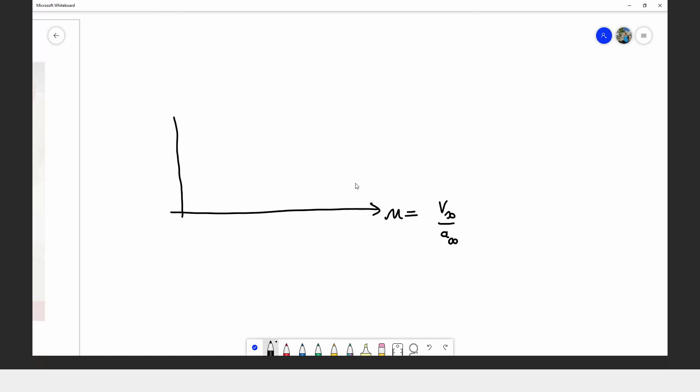Alright. So actually saya nak share gambar sebenarnya, tak jumpa gambar dia. Actually ada satu gambar dalam bidang aeronautics. Okay, dia ada satu graf yang kita panggil Mach divergence. This is adalah Mach number. Mach number ni adalah ratio di antara speed of aircraft dengan speed of sound. Kan? So kalau kita tengokkan drag, daya seret pesawat.

Pesawat ni biasanya dia akan almost constant up to certain Mach number. So bila dia sampai satu Mach number yang dia panggil critical Mach number, then this drag akan mula naik. Okay, dia akan naik dan terus naik.

So saya punya anggapan, okay, sebelum ni kita boleh control kita punya COVID. So kita punya numbers of cases almost kita boleh control lah. Yang awal-awal dulu kan, less than 100 dulu. Lepas tu dia dah mula naik. Kat sini ni selepas pilihan raya dekat Sabah, bukan nak blame pilihan raya tu, tapi it's proven selepas tu kes meningkat. So selepas tu kita dah ada dekat sini, sampai kat sini.

So sekarang ni kes tu mungkin kita ada dekat sini, ataupun kita mungkin dah ada dekat sini. Sebab benda ni dia adalah satu masa nanti dia dilimitkan oleh tahap kesediaan, keupayaan sistem kesihatan kita lah.

Kalau untuk aircraft ni, kalau dia bina wing tu kalau dibina untuk terbang untuk subsonik, bila dia dah capai supersonik mungkin dia boleh patah, kan. Wing tu boleh pecah ataupun patah in flight. Sebab bila kapal terbang tu dia terbang, dia cuba push, enjin boleh pergi laju tapi structure tak boleh nak tahan compressibility effect. So benda ni dia akan naik. Dia cuba pergi juga. Lepas tu dia akan ni lah.

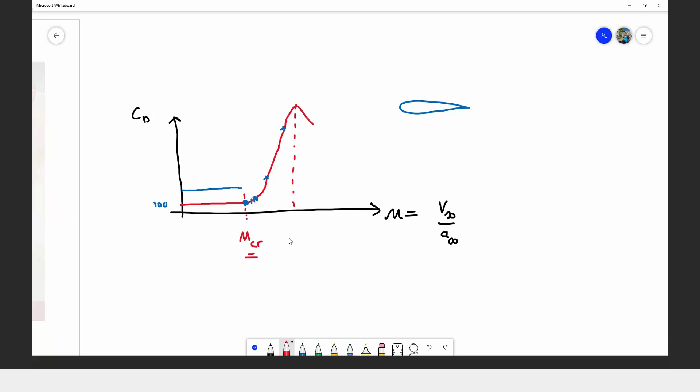So dekat sini adalah, so saya rasa sini critical point kita dah melepasi. Critical point ni maksudnya critical bila kita boleh maintain kita punya number of cases tu. And then ni bila kita dah mula tak boleh nak maintain. Kalau bila Mach number 1 dekat sini, dia dah melepasi sonic, then dia akan terus meningkat, dan dekat sini kalau structure tu tak boleh tahan, then dia akan break lah dekat sini. Tapi kalau structure tu boleh tahan, dia boleh pergi lagi. And then selepas ni kita tak tahu apa yang berlaku selepas ni.

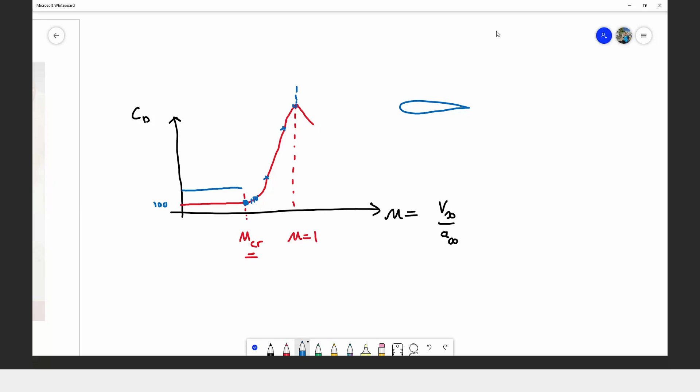So whatever kita kena avoid daripada sampai di stage di mana sistem kesihatan kita dah in chaos situation lah kat sini, kan. Chaos situation. So sometimes this is just a logic lah, just a logic. Mungkin tak tepat kan saya punya andaian saya, tapi kalau tengokkan harian kes, we are in this stage sekarang ni. Kita punya pusat-pusat bilik-bilik ICU pun dikatakan dah sampai dah hampir penuh, kan. Pusat-pusat kuarantin pun dah 90%.

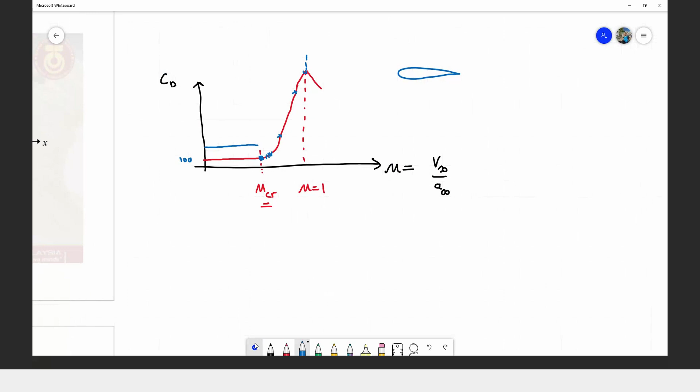So nanti, yalah, hopefully dengan PKP yang akan mula lusa ni, akan meredakanlah benda-benda ni.

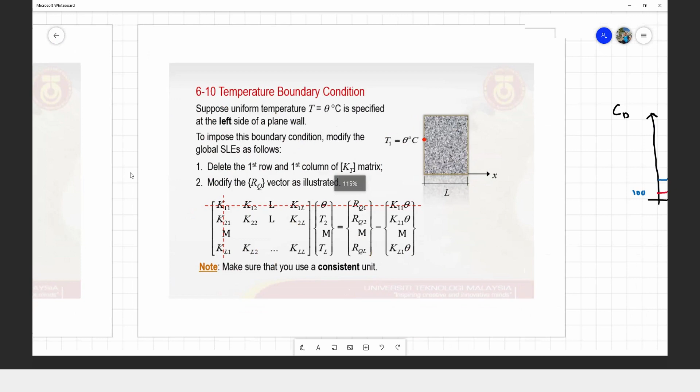Alright, saya ada air dengan saya ni, teh panas. You all pun kat rumah kan, kita buat santai-santai je hari ni. So sambil-sambil tu boleh kacau-kacau air, sambil-sambil makan breakfast juga. Sambil-sambil dengan lecture. Actually lecture ni macam saya cerita sebelum ni, actually sama je dengan yang apa yang ada dalam YouTube. Kalau you all miss dekat sini pun actually you still masih boleh follow up dekat ni lah, dekat YouTube.

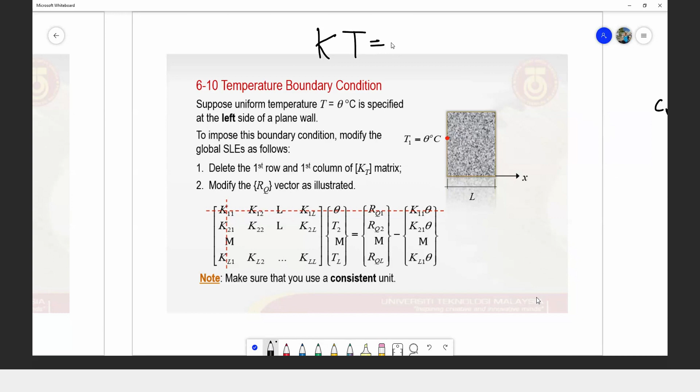So kalau saya dapat ingatkan semula, untuk kita selesaikan heat transfer, so the system of linear equation yang kita akan solve adalah dalam format K T equal to R. So K adalah kita punya, saya lupa dah nama dia apa. Nama dia elemen conductivity matrix. Elemen conductivity matrix, betul. K adalah elemen conductivity matrix.

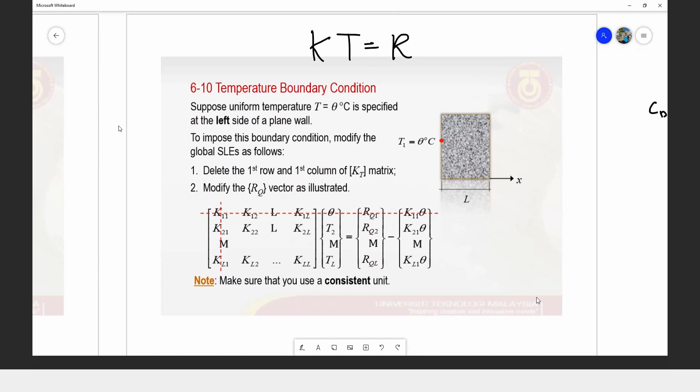T which is our temperature, which is we would like to predict it. So dalam numerical ni biasanya kita panggil predict lah. Predict kita instead of kita measure, ni dia macam lebih tepat sikit kan. Measure biasanya kita guna untuk eksperimen, measure.

Predict, so kita pakai untuk numerical, mostly kita pakai predict to predict temperature distribution. So R adalah heat rates vectors. So R adalah hanya akan ada value sekiranya adanya internal heat generation dalam kita punya sistem. Kalau tak ada, R will be always equal to 0.

Cuma untuk the temperature boundary conditions in the type of specified temperature on any surfaces of our component, then in order to apply the boundary condition, kita kena assemblekan dulu ke semua kita punya KT dengan R, barulah boleh kita applykan boundary condition. Kalau dalam kita punya structural problem dulu, kita boleh apply boundary condition pada local stage, maksudnya pada kita solve element by element tu, kita dah boleh apply boundary condition kan.

Tapi untuk heat transfer ni kita tak boleh buat macam gitu. So we have to apply it after we assemble a complete system of a linear equation, then baru kita apply itu punya boundary condition. So dia punya approach dia untuk specified heat, specified temperature on any surface, which is we can measure it.

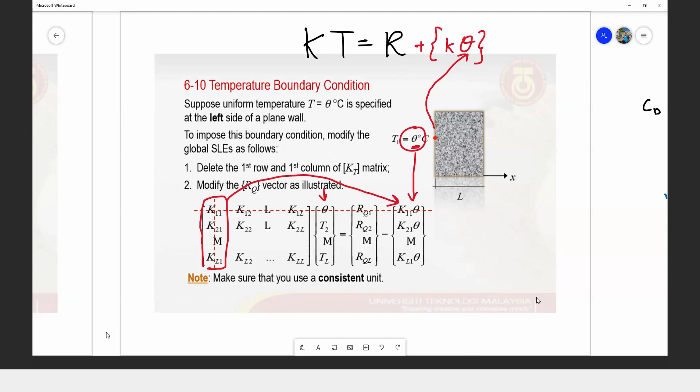So kita ada example nanti. So yang keduanya adalah the convection. Untuk convection boundary condition, that means there is a heat transfer process occurs across this plane wall.

So to further increase the heat transfer process on the right wall, dekat bahagian sini ni, kita nak improvekan dia punya heat transfer. Kalau kita tak ada convection ni, heat transfer daripada surface ni ke udara ni mungkin dia still berlaku, tapi pada kadar yang slow. Okay, bila kita blow air pada temperature yang tertentu, pada convection coefficient yang tertentu, then dia akan increasekan kadar pelepasan haba daripada surface ni ke udara lah. So that's why kita ada konsep fan, air cooler apa semua tu kan.

So in this kind of problem, we do not need to eliminate because kita tak tahu berapa suhu dekat sini ni, sebab suhu pada surface dengan suhu ambient tak sama. So kita tak tahu temperature dekat sini pun, kita still tak tahu actually. So in that case kita tak boleh eliminate the row and column. So what we have to do is, we still have to modify.

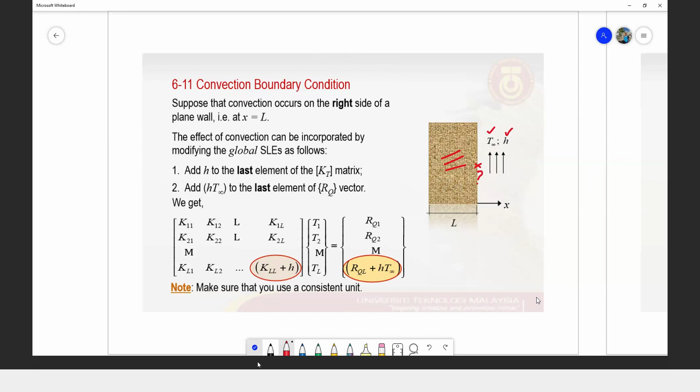Okay, actually kita punya, kalau kita ingat lagi, kita punya equation KT equal to R. So untuk this case we have to add the right hand side by H multiplied by T. Tapi yang ni adalah hanya apply kepada the surface where it exposed to the convections.

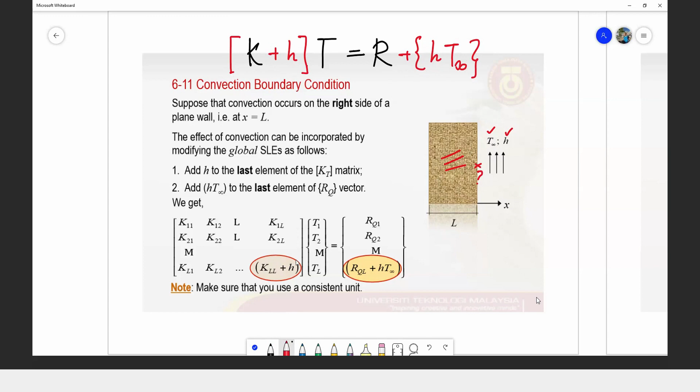On the left hand side pun we have to add the K here by H. And then similarly, yang ni hanya apply kepada the matrix element which is representing the last equation lah, ataupun representing this nodes on the surface of the plane wall. Dia bukan tambah semua, tapi hanya apply kepada the surface that exposed to convection.

So kalau saya boleh tambah kat sini ni, only apply to this one as well. Only apply to surface exposed to convection.

Tapi kalau nak senang ingat dia, roughly macam gini lah: K plus H, kita ada T, equal R plus H multiplied by T. So H adalah H convection, T adalah T infinity the convection. And then it just apply only to the nodes that are exposed, the nodes which is representing the surface that are exposed to the convection.

Let's say kalau saya ada surface dekat sini, and then surface ni pun ada convection both sides, sebab kita let's say kita ada internal energy, internal heat generation kan. So R kita ada value. So dekat sini pun kita ada convection, tapi dia punya temperature dengan H dia mungkin lain. So what we have to do adalah we just apply to the nodes number 1, which is this one lah, K plus H, and then this one plus dengan T multiplied by H untuk yang biru ni. So that's it. Yang lain-lain jangan kacau.

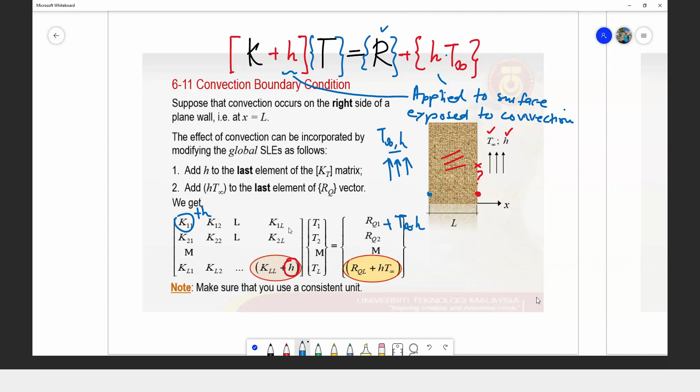Okay, next is the heat flux. So in some cases, we would like to stop the heat transfer from one region to another. Mathematically we can represent it by the heat flux boundary condition with Q, heat flux equal to 0. That means if we want to stop the heat transfer or slow it down.

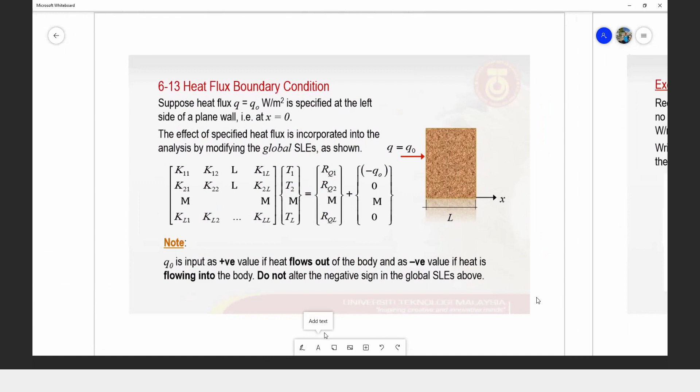And then if we are to solve this kind of problem, we have to modify our system of linear equations, KT equal to R. We still solve the same equation, KT equal to R, but in this case we have to modify the right-hand side equation by including the contribution from the heat flux across the system, across the surface.

So in this example in the slide, we have heat flux that occurs on the left surface, which in this case is our origin, x equal to 0. So at point 1 here, node number 1. In this case we just need to modify the right-hand side equation by including the heat flux to the equation number 1. So the whole row here refers to the first equation for node number 1.

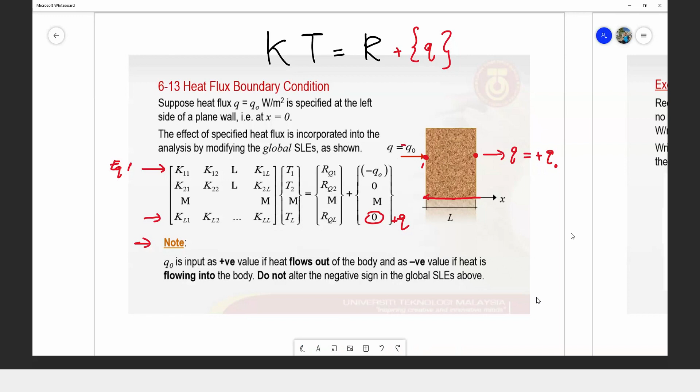So this is just a revision of what we have done in the previous meeting. But the previous meeting was a bit rushed, so let's slow down a bit today.

So now let's look at these examples. Let's take a 2 minute break, drink some water.

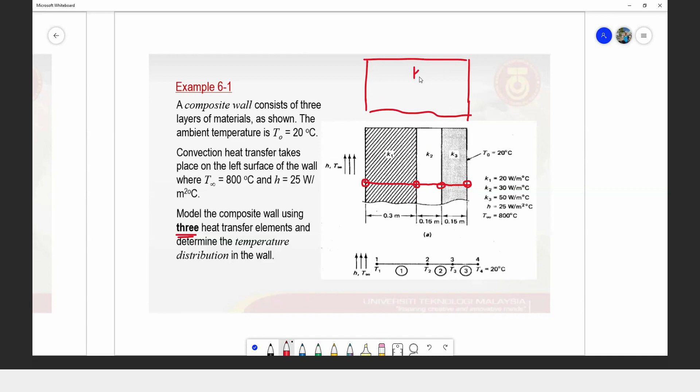So to reduce the complexity, we suggest discretize your element according to the material of your composite wall. Kalau ada satu material je, this is your block. Ada satu je material, K1 je. So macam mana nak bagikan dia kepada satu je?

Biasanya kalau dia minta bagikan kepada 3 juga, bagikan kepada 3 of equal spacing. Biasanya kita akan mention pakai equal spacing, atau K1 kita dah bagi berapa size dia.

As I mentioned, the decision on how you are going to discretize your model is actually for the engineer to decide, to instruct the computer how many elements you want to have, so the computer can generate according to the mathematical model that the software engineer developed.

Satu lagi kita panggil engineer which is using that software. Kalau saya pakai software, saya just bagi tahu the software how many elements I want to have for this structure. Let's say saya letak 10 elemen. Dengan menggunakan algorithm yang software engineer tu develop, actually dia ada mathematical model dia. Mungkin ada beberapa jenis mathematical model, so software engineer pick up one model untuk gunakan dalam software development. Based on that mathematical model itulah software tu akan generate based on input yang kita bagi.

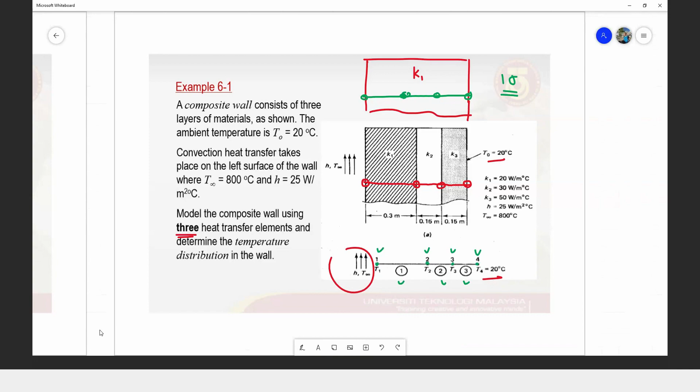So you can write as well on the right nodes we have T4, which is known already, given by 20 degrees Celsius, and then we know that on the left hand side we have this heat convection process. So this is nak tengok semula.

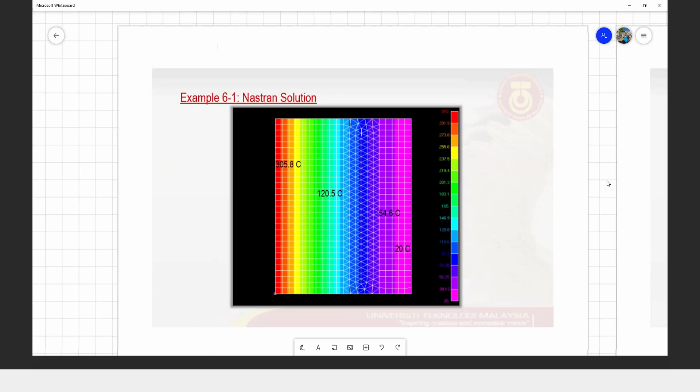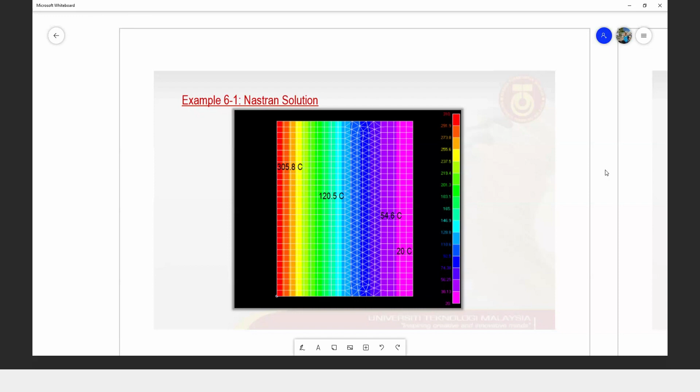So for this kind of problem yang kita ada ni, example 6.1, if we solve using any finite element software, tapi kita discretizekan model tu, kita punya wall tu dengan menggunakan finite elements mesh atau discretization yang sedikit berbeza. Macam yang kita buat kat sini, kita macam 1D problem. So actually if we solve our problem in 2D pun, okay, we will get something like this. So this is the results for the same problem.

So the result for the same problem where we have a convection of 800 degrees Celsius, and then we have 25 watt per meter square degrees Celsius. And here on the surface we have 20 degrees Celsius.

So when we solve this in 2D using Nastran finite element software, we get a distribution which looks something like this. On the very left surface, temperature is 305.8. On the second node, we have 120. Third node, 54.6. And then on the surface here, we have 20. So let's compare this with the 1D solution.

The 1D solution, which is the solution that we are going to use in our course. Alright.

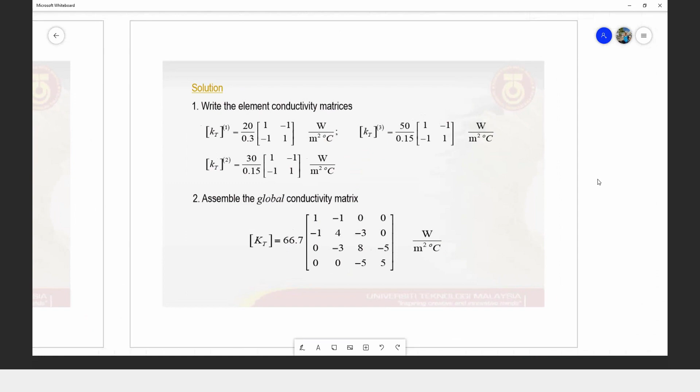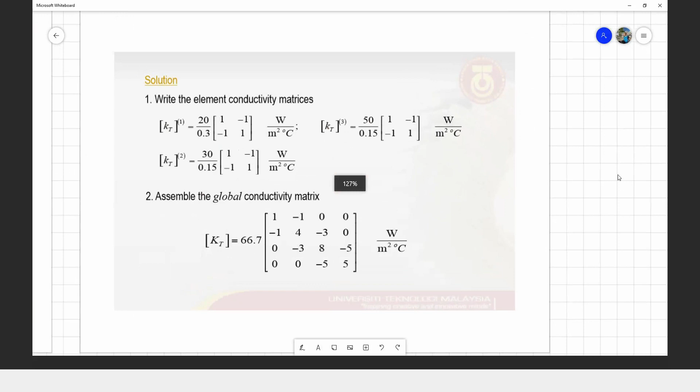So now we know that we have to solve our element conductivity matrix. We have to solve the heat rate vector element by element first, and then we have to combine it as usual. So we write the element heat conductivity matrix for each material or for each element.

So what do we have, if we remember, our K is KE given by K over L, and then we have a square matrix of 1, -1, -1 and 1. But this K is not the same K. This K is the element conductivity coefficient of the material itself, which is given in the problem.

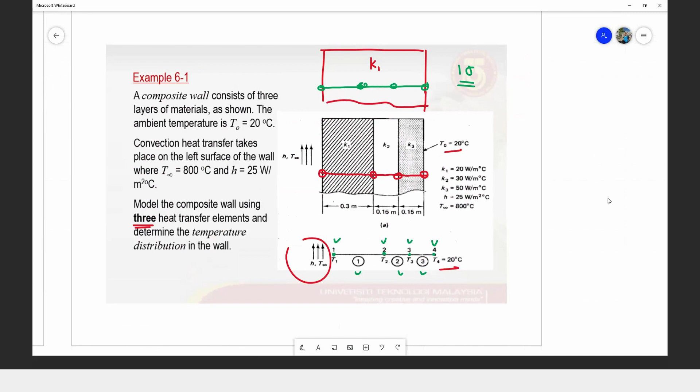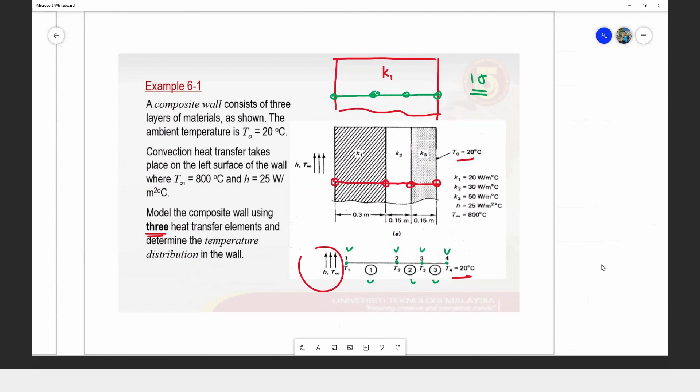Because the material usually has its material properties. Whichever material we want to use, we usually can request it, or if we know exactly what material we are going to use, then we can search for all this kind of information. You can get the stress, you can get the material, the thermal properties of that material, like that. So we have K1, K2, K3 which is given by 20, 30 and 50 watt per meter per degree Celsius. Then we substitute here, which is a very straightforward process.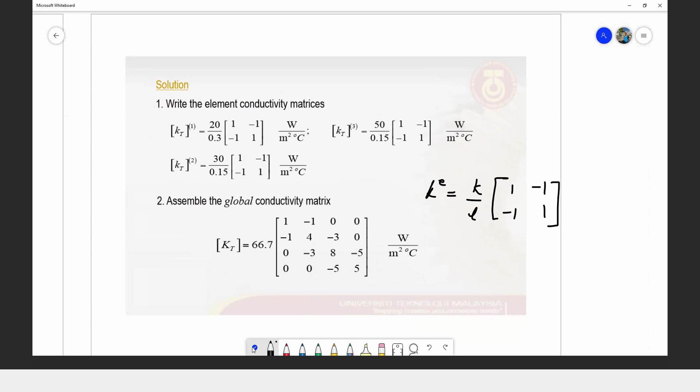So K1, K2 and K3, then you assemble similar to the 1D bar problem before. So we are done with the K, very straightforward. I won't go into too much detail since we've done this many times.

Just be careful, here we have constants. So don't forget them. Sometimes students forget this. If you just carry whatever you have in this bracket and forget to multiply by 66.7, the value becomes very very far off. 1 versus 67 is a huge difference. Imagine 1 degree Celsius versus 66, that's a huge difference.

So now, in our problem there was no mention of internal heat generation. So you can imagine here, when there is no information about internal heat generation, the R vector will be equal to 0 everywhere. So in this case, the only things you have are your K matrix, your T vector, and R vector. R will be all equal to 0.

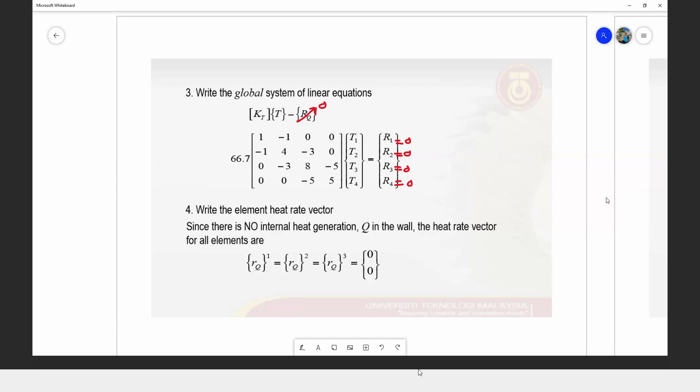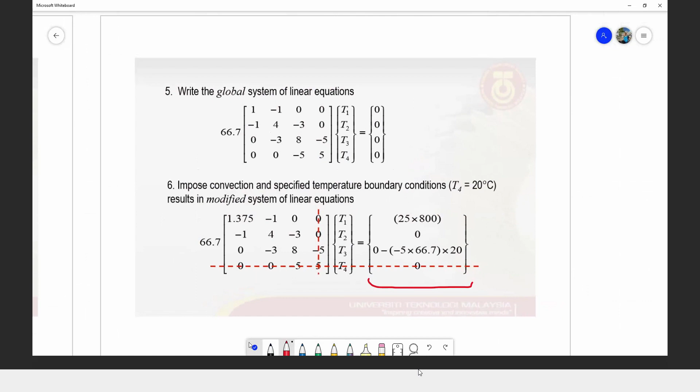But for the learning process, you include it one by one, step by step. Don't do it as a lump sum like this. If you look at step number 6 here, it's a lump sum where you include everything at once, so it's hard for you to trace what actually happens here. So for the learning process, I don't recommend this approach. What you have to do instead is detail it out.

So if we look closely to our system of linear equations, I have this. Let me take this again. So I have 66.7, and then 1, -1, 0, 0, -1, 4, -3, 0, and 0, -3, 8, -5. Then I have 0, 0, -5, 5. So this is my K matrix.

Don't forget this one. Then I have T. So this is my T1, T2, T3, and T4. And all of these will be equal to...

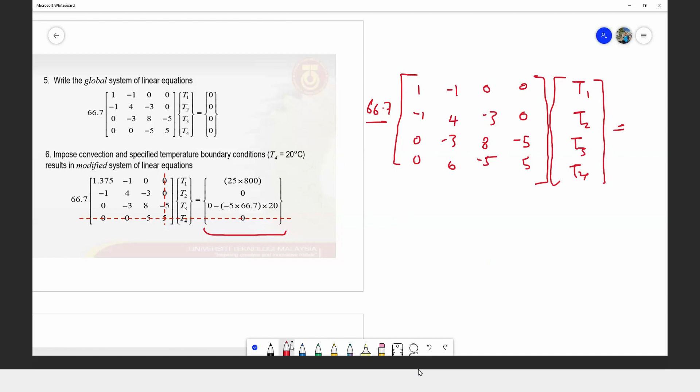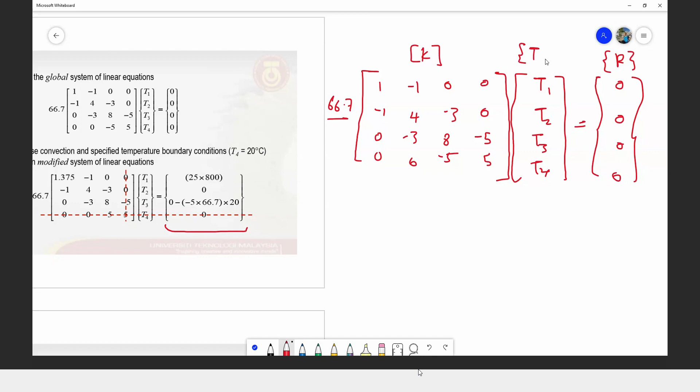Let's not rush, we solve part by part. So this is our R, which all of them equal to 0. So this is my R vector. This is my K matrix, and this is my T vector.

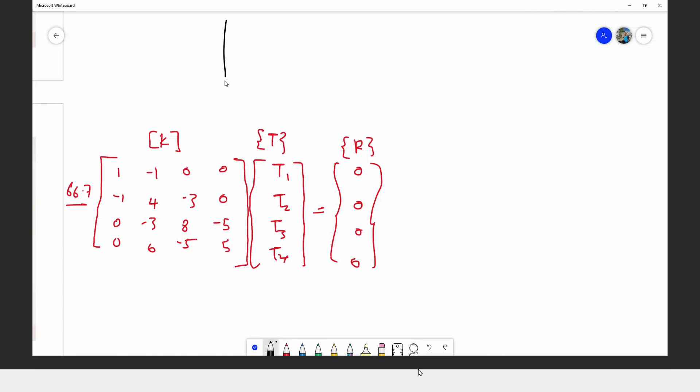Now we know, in our problem we have this structure. So we have the T, and we divide it into 3 elements. So I have node 1, 2, 1, 2, 3, 4. So element 1, element 2, element 3. There are 3 elements. Let me enlarge this a bit so we can see it better.

So I already know which is T4, given by this 20 degrees Celsius. Then I also know the H and T here, which is 800 and also 25 watt per area per degree Celsius, which occurs on the left hand side of this surface on node number 1. So which one should we start with?

Okay, we can start with the known boundary conditions, which we know is equal to 20. Then we eliminate this and this row and column.

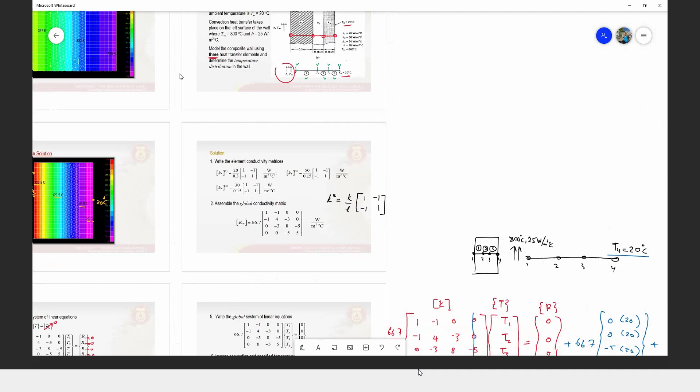Okay, thank you. And then we have the contribution from this convection, so we add it. Add or subtract when there's convection? Let's look again.

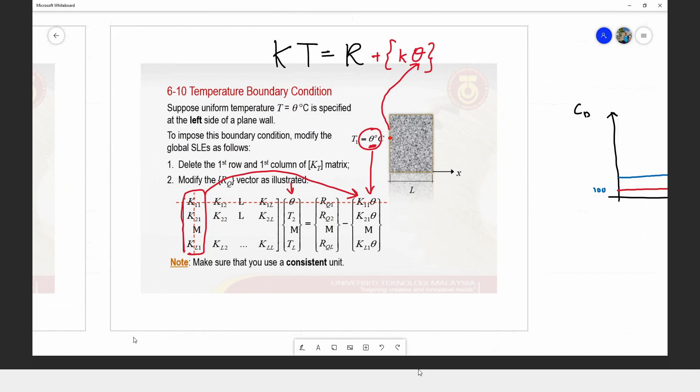Okay, for specified boundary condition, we need to remember we have to deduct by these values. But for convection boundary condition, we add it. So where were we? When we are here, instead of plus, we have to minus it.

So this is the contribution from the specified boundary condition, and then here, what we have to do is add h T infinity here. Since the convection occurs on the first node, we modify this, then add it by 25. So H here is multiplied by T.

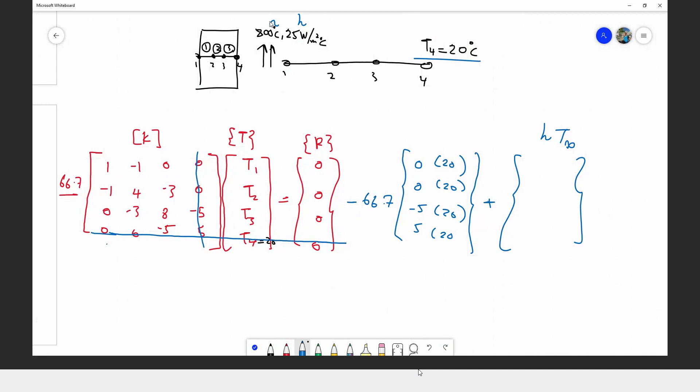So this value here multiplied by this, then plus by H. So it's not 1 plus H first before multiplying with this. We have to multiply this value in the bracket by 66.7, plus H. So you will have 66.7 plus 25 to replace these numbers there.

So I do it like this to replace this part here, this element. And then on the right hand side, we have to include 800 multiplied by 25. The others, since there's no convection occurring there, no convection, no convection, we just fill this column vector with 0.

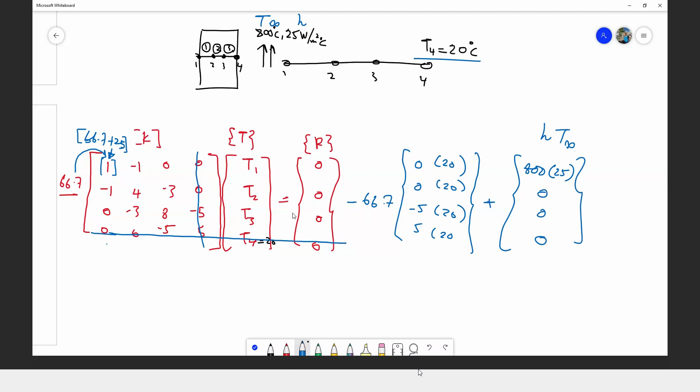So if we refer back to this slide. Okay, let me try to show everyone. Hopefully you can see all of them. So we have here, on the right hand side, 25 multiplied by 800.

If you look here, this is 0. This will be 0, will be 0. So you will have a value here and here. And then, for the first row, we only have 800 multiplied by 25. So we have this. 0 plus 0, we have this.

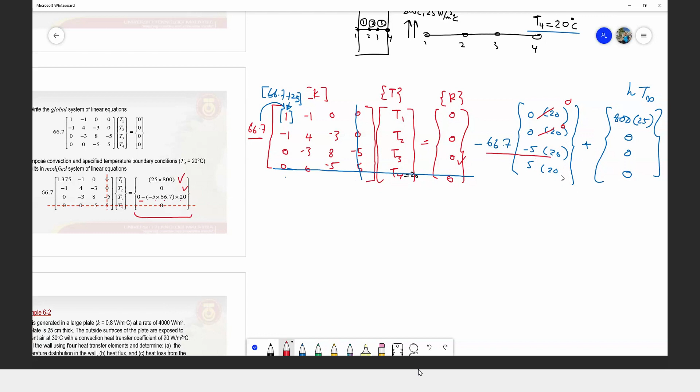Okay, yang ni dia ada value, tapi kita eliminate the whole thing. So actually ada value ni dekat sini, which is 5 multiplied by 20 negative value dekat sini. Tapi kita tak pakai lah sebab kita dah eliminate kan dia.

And then can we check this one? So yang ni dah boleh faham kan macam mana dapat dia. Actually a contribution from the R, kita ada contribution from the T naught tadi, and then contribution from the convection. So kita ada 3 components.

Okay, cuba on this in our matrix dekat sini ni. Okay. Where is this value came from? 1.375. Can someone verify this?

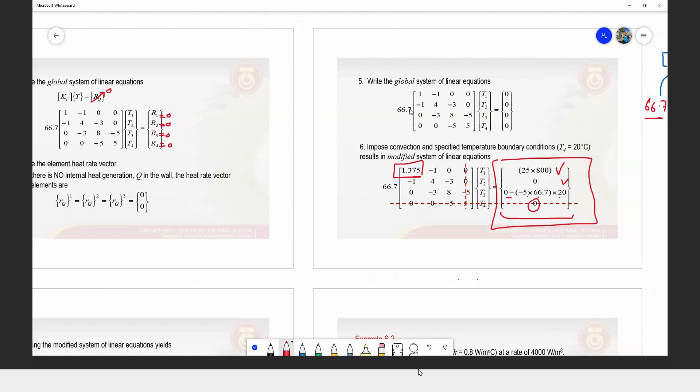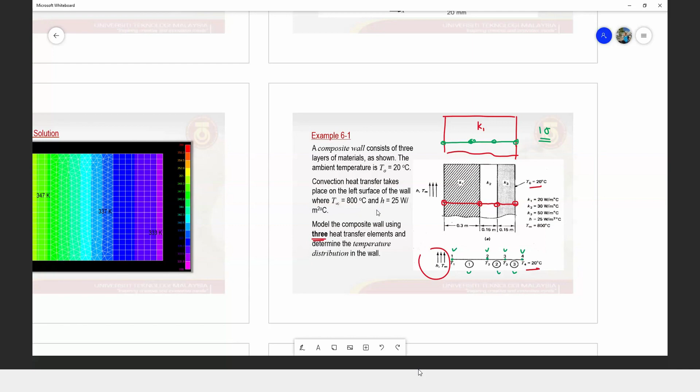Daripada mana datang dia? So we have h 25 watt per meter square per degree Celsius. Okay, kalau kita tengok boundary condition yang convection punya boundary condition, so very straightforward, kita just add the K elements dalam kita punya element conductivity matrix by H.

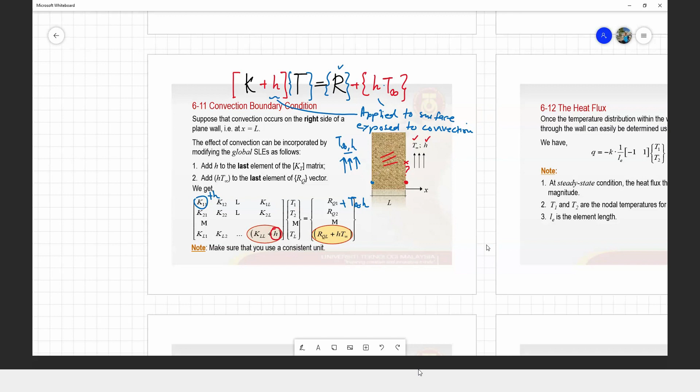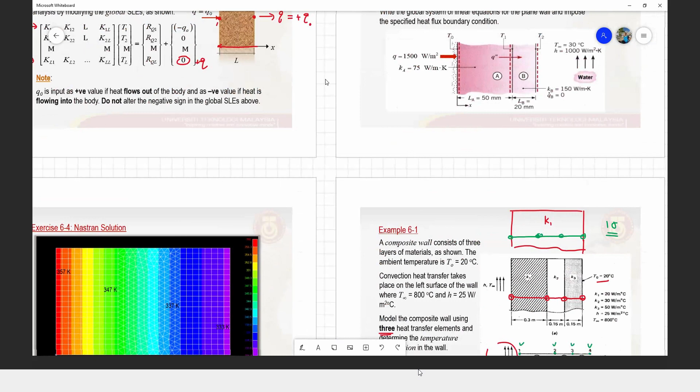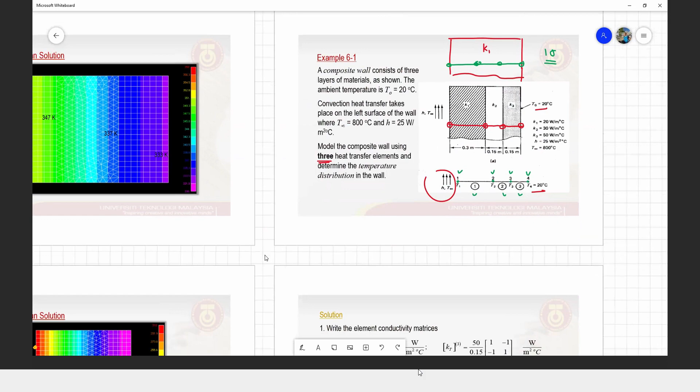Sorry, dekat sini kan kita just tambah dia dengan H. Tapi kenapa kita dapat dekat bawah tadi 1.375? Where that number came from? Can someone help me here? Sambil-sambil kita minum teh ataupun kopi. Mana datang dia? Tak ada ni information ni 1.375 ni. Anywhere. Tak ada ni.

Kan? Mana datang eh?

Sebab tu you have to dalam apa ni, dalam lecture note, dalam textbook sometime dia punya shortcut dia tu dia jump very big step. So kalau you all tak teliti, you may lost lah.

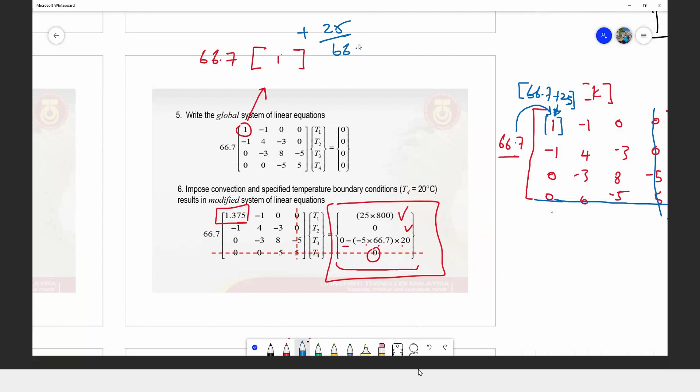Actually this 1.375 ni actually came from, asalnya kita ada satu je, sorry. So we have something macam ni, kita ada satu je kan, let's say saya just ambil value this value there, and then kita nak tambahkan dia dengan 25.

So what happened here was dia dividekan this dengan 66.7 supaya this number kita boleh directly add inside this, then bring the constant outside. Kan? So if you take 25 divided by 66.7, berapa you all dapat? 25 divided by 66.7, ni value dia adalah 0.375, betul, which is equal to 0.3748 lah, kita 0.375. So in that case, sebab dia nak maintain benda ni dekat luar ni, so dia akan tambahkan dengan 0.375. So dapatlah macam gini.

Actually this apa yang kita ada dekat sini ni, ni so apa yang kita ada dekat sini actually is the same as 66.7 plus 25 as we did here ni. So itu je.

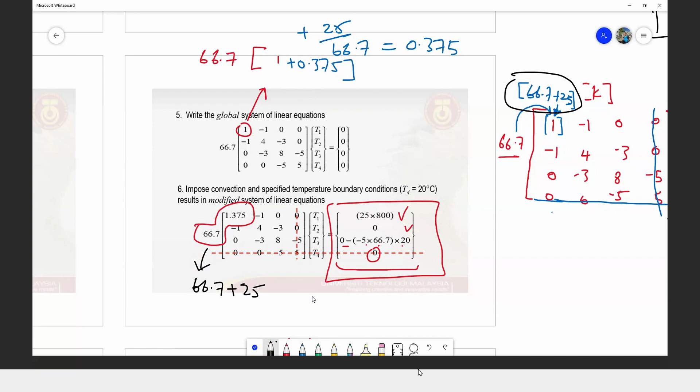Just maybe a bit confusing lah kalau you all baca this slide. Saya mula-mula ngajar dulu pun sebab this slide kita just receive from senior staff yang sebelum-sebelum dia ngajar. So apa benda ni kan.

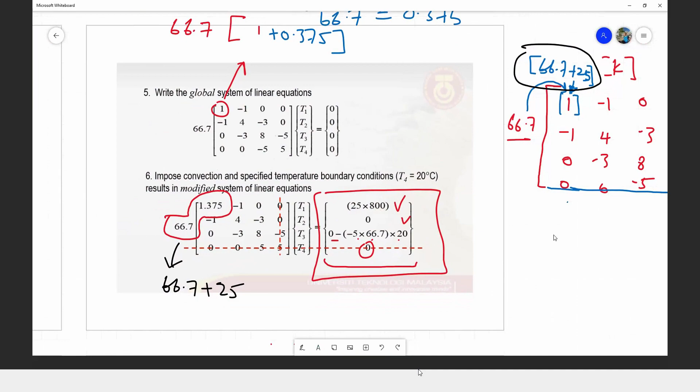So my approach very simple je. Kalau kita jumpa benda-benda susah, we go to the most very basic kan. Solve it step by step. Step by step. So bila kita solve step by step, so we will get something like this.

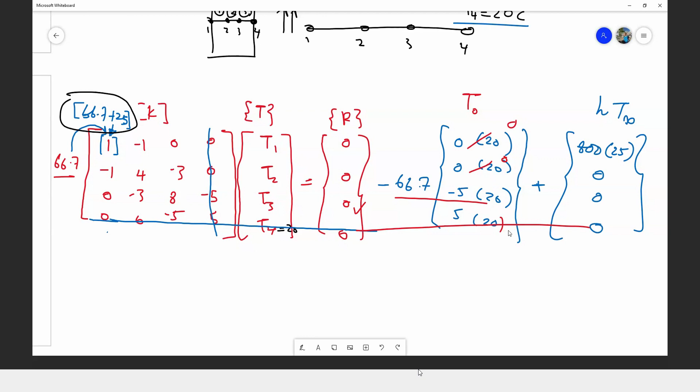Kita nampak it's clearly macam mana K kita diubah, the right hand side equation kita apa components yang kita perlu modify ataupun kita perlu tambah kepada right hand side equation kita. And then if we solve everything dekat sini, finally kita akan dapat sama juga dengan apa yang ada dalam slide ni. Okay, kita akan dapat benda yang sama dalam slide ni.

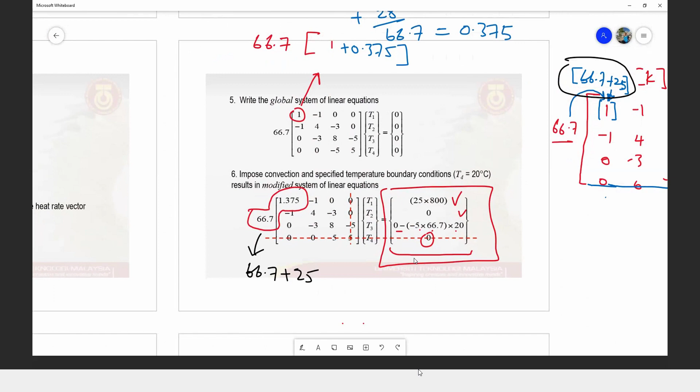So when you reach this stage, okay, you only have 3 unknowns, and then this is very straightforward for you to solve by using calculator lah. So in this stage, you are allowed to use a calculator lah to obtain the unknowns in your matrix or system of linear equation.

So bila tekan calculator, then you will get this temperature distribution ataupun temperature at each nodal point. Tapi kalau boleh, meskipun soalan tu tak minta kamu plot the graph tu kan, kamu plot lah sikit, tak ambil masa lebih 2 minit pun, which is engineer dia bukan hanya generate numbers, okay, tapi dia also generate understanding.

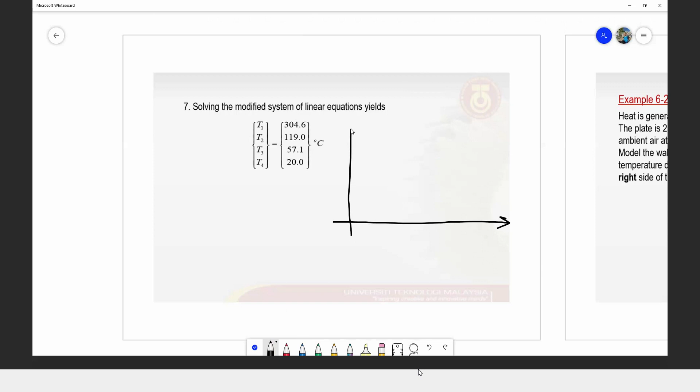Kalau just baca numbers macam gini, 4 number gini will be easy for you to understand. Tapi when you have more numbers, kamu tak boleh nak faham dah number tu. Apa yang boleh kamu faham adalah figures.

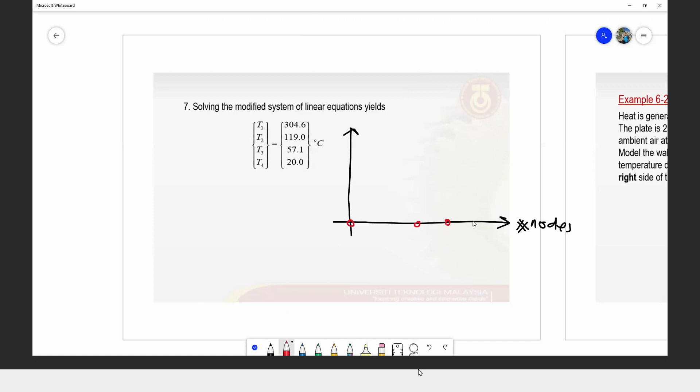So numbers when it translate into figures, so let's say kamu nak buat macam gini boleh, tak nak tulis, ni tulis nodes numbers. Let's say nodes number 1, nodes number 2, nodes number 3, nodes number 4. Kan dia distance dia tak sama kan. So dekat sini you have temperature, degree Celsius. So nodes number 1 is at 300 roughly, just sketch here, not need to write it into scale.

Let's say kamu ada situ, let's say ni adalah 300, this is 200, so this is your 100, 0. So now it will be easy for you to draw. This is your first point there. Second point, you have 100 and a bit, which is there. If you project it there, ada dekat sini. And then you have next is 57, which is roughly halfway. And then you have 20. So draw je lah straight line. Kan, it's much more clearer to see.

Okay, this is how the temperature distribution looks like. So it don't take you more than 2 minutes lah untuk this, I think. If you go to work, you just not generating the numbers. No one interested in the numbers because kita tak boleh nak digest. Our brain cannot digest the numbers.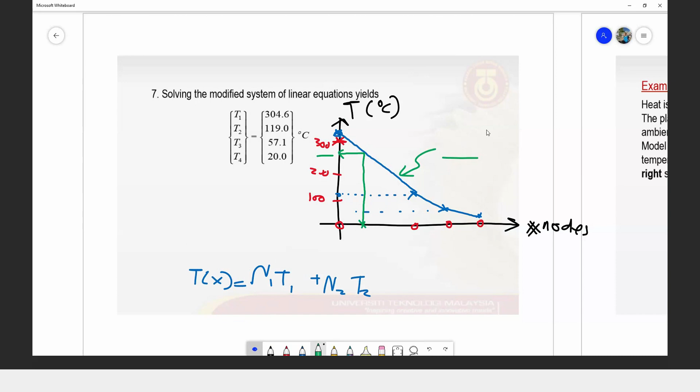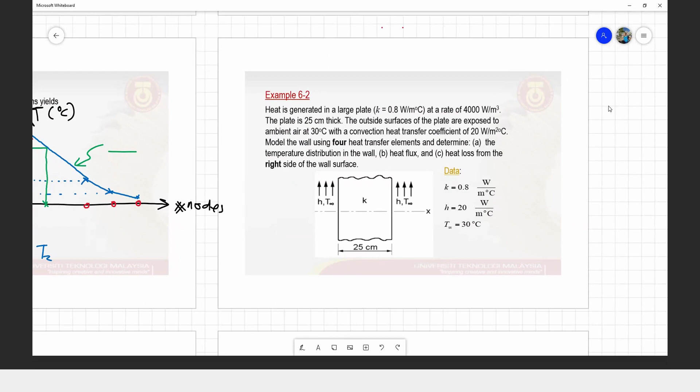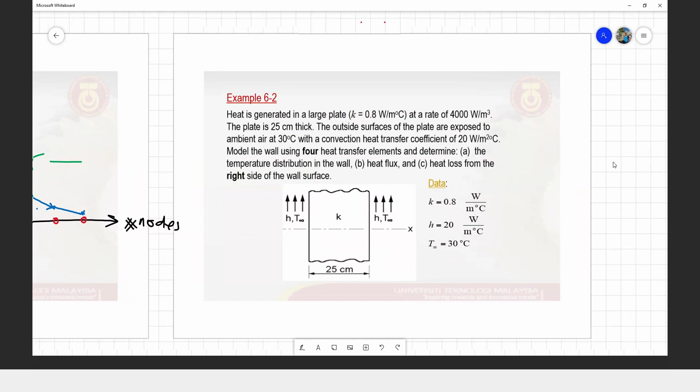Alright. Okay, that is one examples lah. One examples on this heat transfers to the plane wall. So now untuk yang ni saya rasa saya tak nak explain in detail. The process is the same. Cuma saya nak tanya, what will be happen if

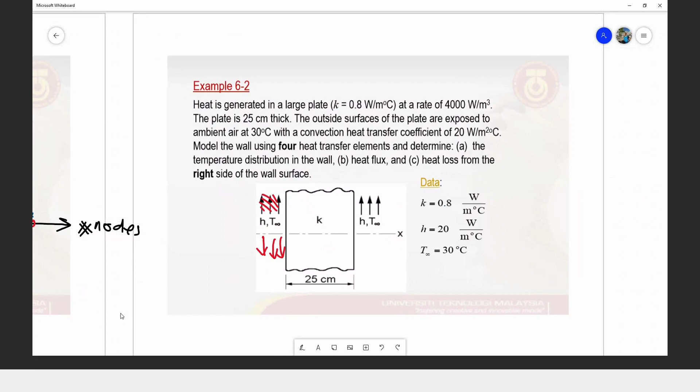As you can see the convections semua dalam arah ke atas kan. So what will be happen if the convections on one side dekat sini ni instead of dia ke atas, dia ke bawah. What will be happen to the value lah, at least the temperature and H on the left hand side of our wall. But kita kena substitute dia ni. Kita kena substitute dalam kita punya K matrix dan juga right hand side equation kan. So what will be happen?

Betul, Aiman cakap, still the same, betul lah tu. You can imagine macam gini lah, kipas kan. Kamu duduk depan kipas ataupun kipas blow daripada belakang, kamu rasa sama je dia punya speed of the fan. At least the temperature dengan convection dia tu sama je. Dia tak akan jadi negatif pun.

But dia through this surface kan. Kalau dia blow macam gini, mungkin kat sini ada kesan. Kalau dia blow macam gini, yang ni kuat rasa, tapi kat sini temperature dia dah lain kan. Tapi in our case this convection process occurs parallel to the surface, so dia tak ada effect apa pun. So dia akan maintain H and T dengan value yang sama, dia tak akan jadi negatif pun.

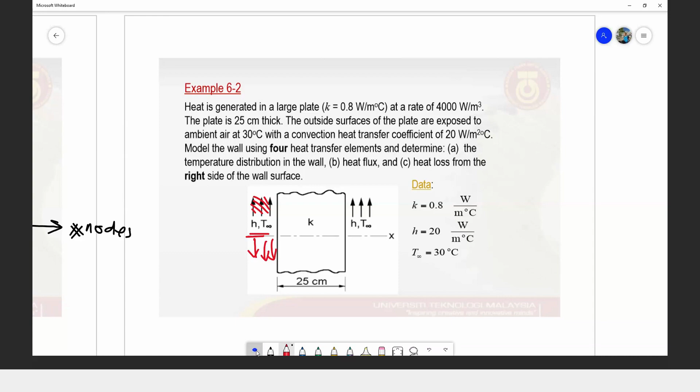So substitutekan dia dekat in your equation. Okay, cuma dekat sini as you can see kita ada internal heat generation. Cuba tengok soalannya semula.

Okay, heat is generated in a large plate, which is a single piece plate of the same materials. Ini adalah dia punya heat conductivity at rate 4000 watt per volume. So we can imagine kita punya blocks ni macam brick ke apa kan, ataupun kita ada macam bar ke, ataupun thick plates ke.

Then untuk 1 meter cube size, okay let's say 1 meter cube size, dia akan generate about this much of heat internally. So kita boleh imagine macam kita ada internal combustion engine ke, macam gitu lah.

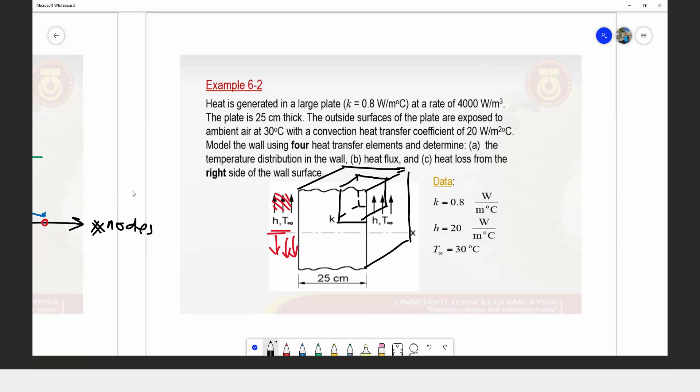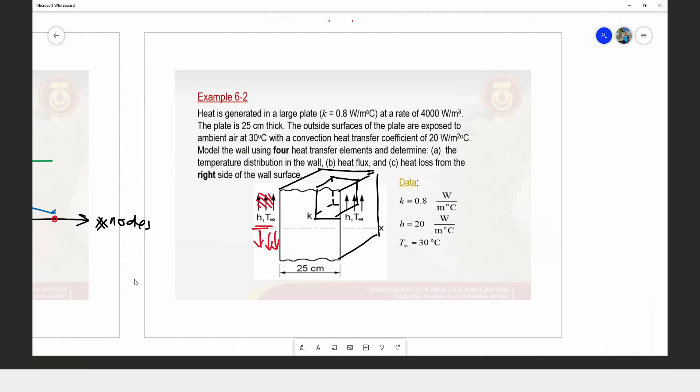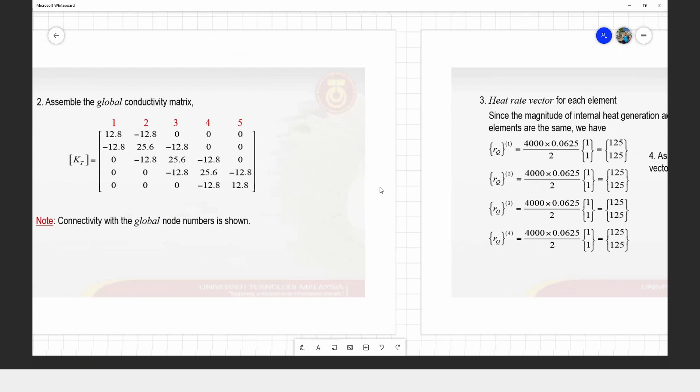Yang K dah boleh faham kan? Yang K is straightforward, K. Untuk yang R vector, so everywhere is generating the same amount of heat.

So the way we solve it, kita akan substitute the value of the heat generation to all elements lah. Kita ada 4 elements, so kita generate it with the same amount of heat, internal heat generation. So kita akan dapat macam gini, R1, R2, 3 and 4.

Then we assemble it. So when you assemble it, you akan dapat the global heat rate vector as shown here.

So ini pun kita assemble macam biasa lah. Kalau ingat lagi kita ada node kan, kita boleh tabelkan dia sebagai node 1, 2, 2, 3, 3, 4, 4, 5. So yang overlap ni kita tambahkan dia je.

So 125 plus 125 you have 250. 125, 125 you have another 250. 125, 125 you have 250. Satu dia single, dia 125. Yang 5 pun dia ada single values dia, which is 125.

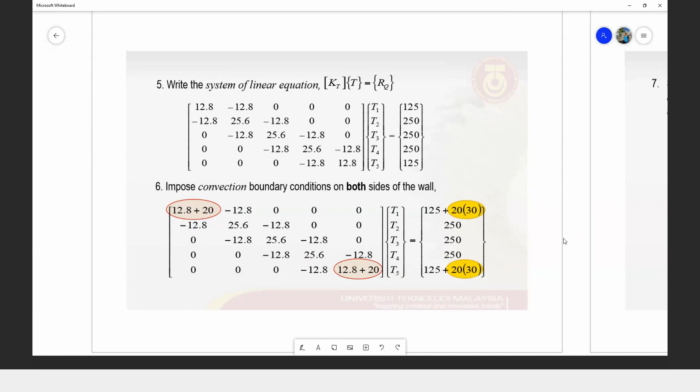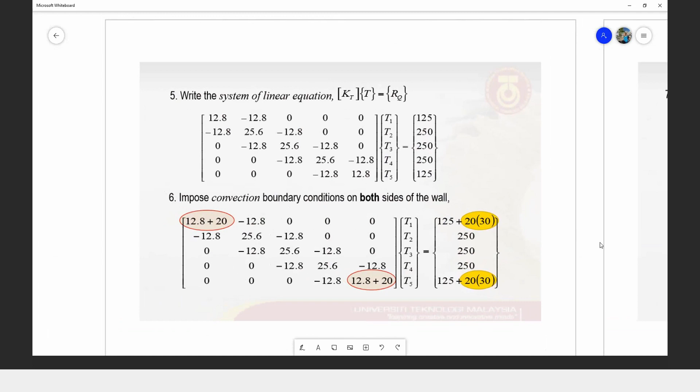Cuma untuk this problem, kamu tak boleh nak solvekan dia pakai calculator lah, sebab you have 5 unknowns dekat sini. Tapi biasanya as I selalu ingatkan, untuk this course saja, we limit the number of unknowns maximum 3, which will allow you to solve the problem using your calculator. If we have more than that, then tak boleh nak solve pakai calculator.

Otherwise you have to use the manual calculation to solve the Gaussian elimination, kan? Tapi yang tu kita dah go through topic plane trusses, which is you have to manually calculate the Gaussian elimination.

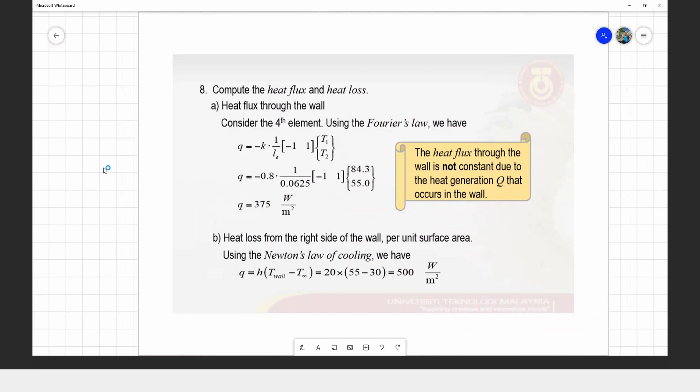So actually this course ni, I think after I join teaching this course, bila first time tu kita tak nak ada banyak perubahan kan, kita tak tahu apa nak ubah. So while we go through, we improve how we test the student lah, test the understanding, comprehension of the student toward this course.

So kalau tengok soalan yang zaman-zaman dulu punya, kalau kamu collect soalan zaman-zaman dulu, ada yang lebih kurang, which is the problem itself dia tak ada so much way, we play around lah kan.

So some other problem we can play around with. The question is, if you have a collection of past semester questions from 5 years and above, the questions are quite different from now.

I think since 4 or 5 years back, we started to change the way we teach students. Like in test 1, we test you but we guide you. Before, they tested but didn't guide, same thing, but now even though we test you, we still guide you so that you don't lose. This is a learning process.

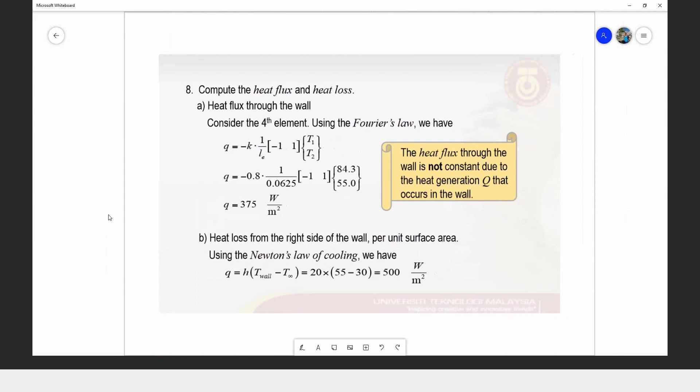Actually I sometimes disagree that good students should only be among good students, because we shouldn't build our country that way. What should happen is, if we have a group of good students, these good students should actually be put together with those who are a bit slow.